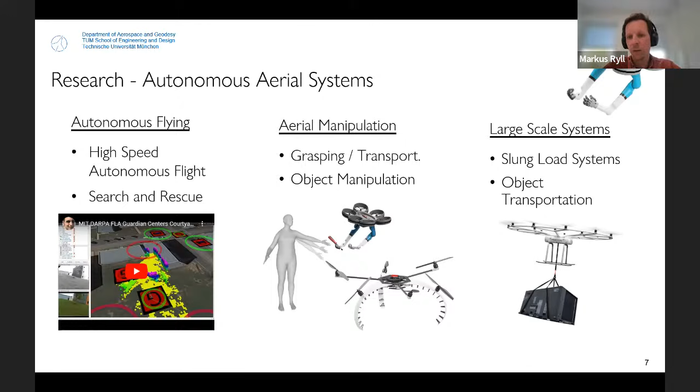Then, everything that we learned in the first 2 pillars, we apply on larger scale systems that require a very different set of safety constraints. This is because these kinds of platforms are really in restricted airspace and therefore have to follow all the regulations for restricted airspace.

So let's go into the field of aerial robotics. Aerial robotics is a growing field of research, and typical scenarios we tackle are, for example, the maintenance of broadcast towers, or the maintenance of power lines, as well as construction sites that are arbitrarily far away or remotely located, and the typical case of industrial climbers that have to maintain wind turbines.

The common theme of all these problems is that these kinds of tasks are first of all dangerous for human beings, and at the same time expensive, because either you have to employ industrial climbers to solve this task, or you have to use helicopters, or you have to set up scaffolding, which takes time and is expensive.

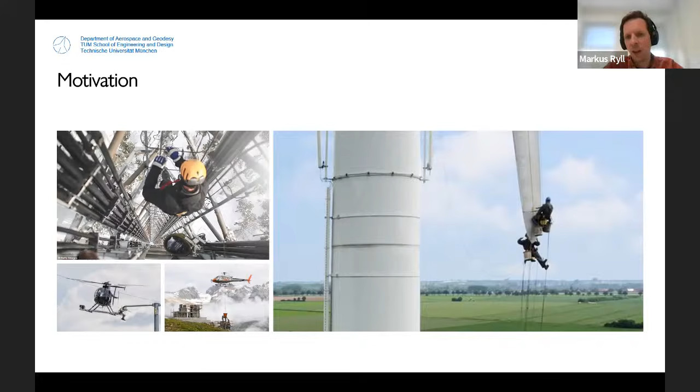And to motivate that a little bit more, I brought you a video today, and I hope you can see it. Otherwise, you could try to look it up on YouTube as well, you'll find it there. So what is conducted here, and I'll stop from time to time to explain it a little bit better, but I hope you can see it sufficiently well, is the maintenance of power lines.

And in order to do that, there are basically two different options. You can do the maintenance of a power line either by an industrial climber coming from the bottom. But in order to do that, you have to switch off the power line, because the risk is too high that you ground the power line through the climber, which would cause an electric shock to the climber.

The other option is leveraging helicopters, as you hopefully see in the video. What you see here is an industrial climber sitting on the landing gear of the helicopter or on a designated spot underneath it. The industrial climber is flown to the power lines.

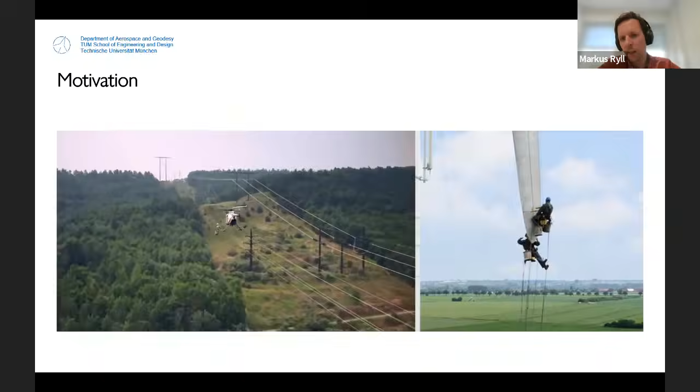And the task of the industrial climber is to climb on the power lines towards the power towers and check the isolators. That is, first of all, a very expensive task, but as well a very tedious and dangerous task. There are several fatalities per year in this kind of task.

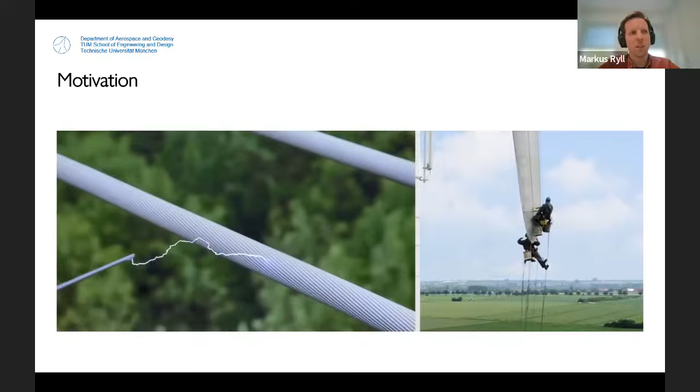Let me quickly jump a little bit forward so you see what is actually happening then. You will see that the industrial climber is putting a safety harness on the power lines and then crawling slowly towards the power tower to check the isolators.

And you can see as well on the parallel side, on the opposite side, there's a second industrial climber checking the other side. And you can imagine that this is a very tedious and very dangerous task.

So what we foresee on the long run for my group is to actually do this task with aerial robots, robots that have dual manipulators in order to perform it. But to do that, there are plenty of challenges that have to be solved before this is possible.

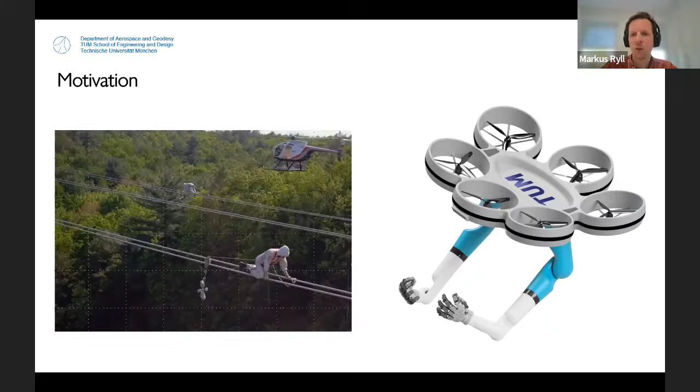In the next two slides, I try to summarize the three main challenges that I see in the domain of aerial robotics. What I'm going to do in the next few minutes is discuss the differences and challenges of aerial robotics compared to the typical case of a ground robot.

So let's start with the problem that we are working with a floating base. That's the first challenge, which I summarize under the topic of a floating base. You all know if we have a quadrotor that flies, we have to directly compensate any applied wrench to the system. If you think about a ground robot, you can just pull the brakes, and if you push it, the system will not move. But for an aerial robot, as soon as it experiences any wrench applied to the system, you have to directly compensate that.

Otherwise, it will quickly drift off from a desired position or orientation. Secondly, on flying robots, we have significantly higher, or more inaccurate, positioning. This is related first to the nature that we move in 3D, but also to the fact that our system is always vibrating and drifting. So we cannot stop and check for a long while or try to estimate our position or pose for a long while, we're always drifting. That generates, on average, a higher inaccurate positioning.

And last but not least, and therefore I brought you this picture, if you really want to do aerial manipulation, you have to have some kind of actuator on board. Let me quickly change here to the pen so I can highlight a few things. You can easily imagine if we have this arm underneath it, let me draw the arm. If we try to move this arm, we apply a torque with the motors.

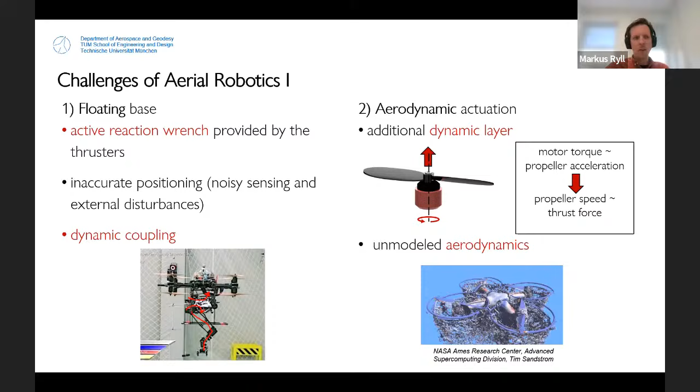Then the third challenge I see is the problem of having as lightweight a platform as possible, and this causes several additional challenges. If you think about the domain of aerial physical interaction, that usually means our end effector has to be built as lightweight as possible. That usually causes us to use very weak motors, and we build a structure that is very lightweight or hollow, which causes vibrations of the end effector.

And additionally, it causes, due to this lightweight structure, a lot of unknown non-linearities in the behavior of the end effector. And that is a challenge to use for a proper physical interaction.

Secondly, our perception is very limited, especially compared to other autonomous agents, like autonomous cars, due to the fact that we have to use lightweight sensors and a minimum set of sensors. So the most typical scenario on board of a UAV is that you have an IMU plus one additional sensor that tells you something about your pose. This can be a set of cameras, or just a monocular camera, or a LiDAR. But usually you have just one set of sensors, and they're usually small sensors of smaller cost. So the quality of these sensors is limited.

Last but not least, we have very limited computational power on board. That forces us to use simpler algorithms than we are used to, for example, in autonomous cars. And we usually have to decide whether we want a CPU on board or a GPU. Both are usually some kind of edge device, so again with limited resources.

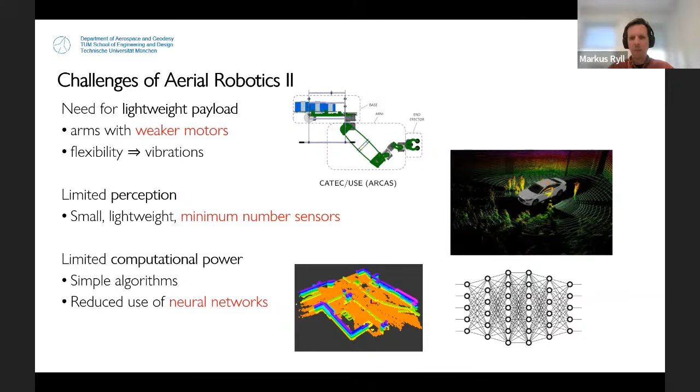First of all, this is a rather small scale platform, and it has more or less the dynamics of a flying fridge. It's a very small platform with a heavy computer on board, which relates to the fact that the flight time of the system is only about 8 minutes. The weight of the platform is approximately 2 kilograms, and the size is approximately 35 centimeters.

I guess most of you are familiar with this camera, but for those who are not, what we see on board is, in the center, an RGB camera plus 2 infrared cameras on the sides. These infrared cameras are used for stereo vision, and they provide an additional depth of the environment.

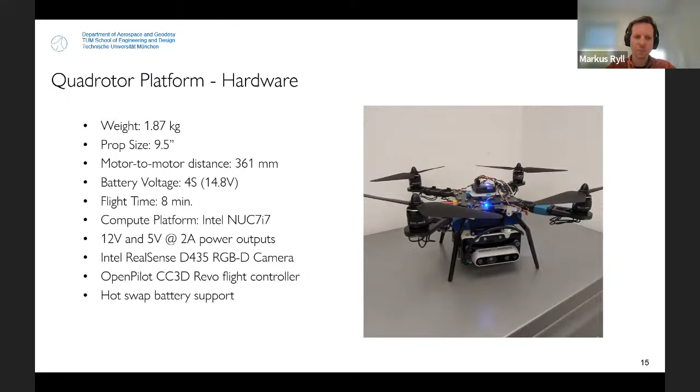Let me go to the capabilities of this platform. Overall, this platform and the software stack associated with it was aimed at enabling GPS-denied navigation. So we wanted to fly in an environment where we can't rely on GPS. That could be, for example, due to the fact that no GPS is available, due to a tree canopy, or we want to move from an outdoors into an indoor scenario, or we could assume that the GPS is jammed in the environment we're flying.

Additionally, we want to fly fast in a cluttered environment, roughly at an altitude of 3 to 4 meters. At the same time, what we want to do on board is object recognition. For example, we had an object recognizer running on the platform that detects cars, people, doors, and so on.

And we want to as well localize those objects. Additionally, we want to do a fully autonomous exploration of the unknown environment, creating while we're flying a dense 3D occupancy grid of the environment, and enable visual semantic segmentation. We showed that we can leverage classes of the underlying ground for the trajectory planning stack, for example segmenting roads and other classes of the environment. Last but not least, we implemented waypoint navigation.

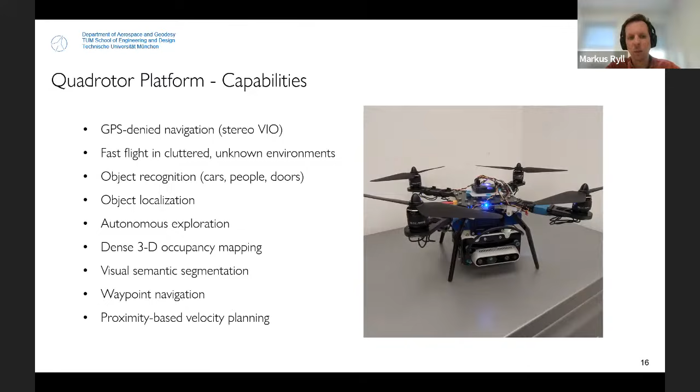So let's stop all this talking about the platform and let me show you a video with some experimental results. First of all, what you see here is the typical RViz environment, with highlighted in the center the actual representation of the environment with an overview image from Google Maps. What you see additionally here is the starting location, marked here at the bottom. The drone starts here at the bottom point.

The task of the drone now is to autonomously navigate to certain waypoints referenced to the starting location. The first waypoint is the one you see here at the top, just about 200 meters in front of the drone. Additional waypoints will be behind those buildings you see in the top right corner. In order to get there, the drone will have to autonomously find a small pathway between these two buildings you see here at the top.

Apart from this, the drone is actually programmed to be curious about cars. So as soon as the drone sees a car, it will approach the car and map it in this visualization of the environment you see here. What you see on board on the left side in this grayscale image is actually the object detector. For clarity, we have here in the lower left corner the RGB image from the camera of the drone. So let's get started.

We'll directly see the drone taking off and first heading towards the next waypoint, but then starts to detect the first car, so it deviates from the original flight path. As soon as it has mapped the car, it continues with the waypoint navigation. You see the drone reached the first waypoint, then detected again a car, and now continues to follow the waypoint navigation.

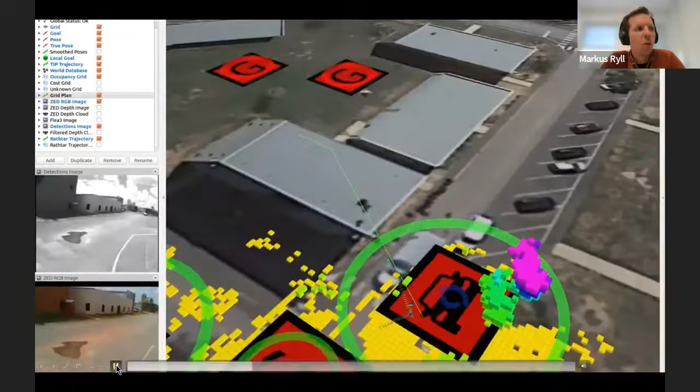Let's wait a second until the drone now navigates to the small corridor. So far, with a very limited perception, the voxel grid representation has not detected these two buildings you see here. In a few seconds these two buildings will pop up, and then the drone will start to navigate through the dense, tight corridor here.

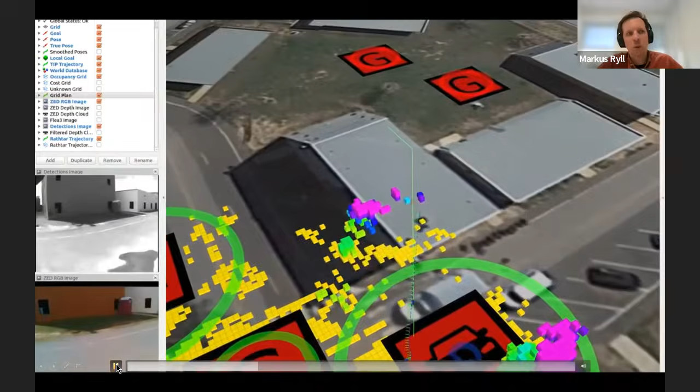A few words with respect to the corridor: the buildings were approximately 1.5 meters away from each other. That leaves a navigational space between these two buildings, given that the drone is approximately 50 centimeters wide from propeller to propeller, just a range of 50 centimeters on both sides. So we had to very tightly navigate through this environment.

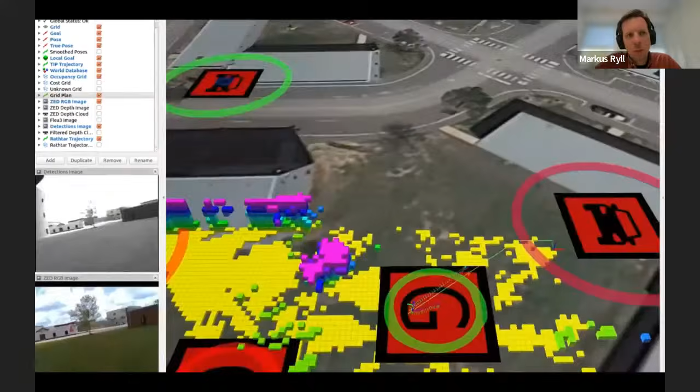What you also see from time to time in the voxel representation is some kind of salt and pepper noise that is just hallucinated by the RealSense.

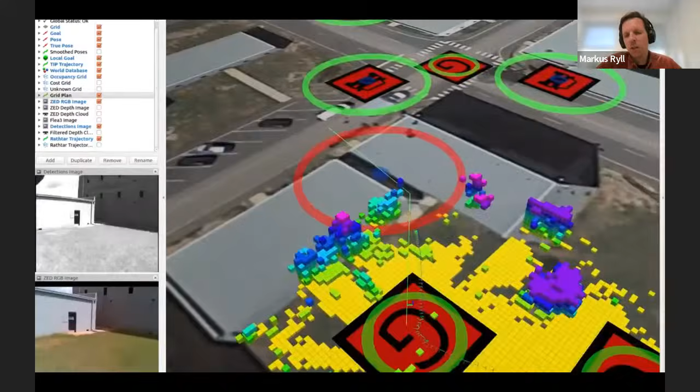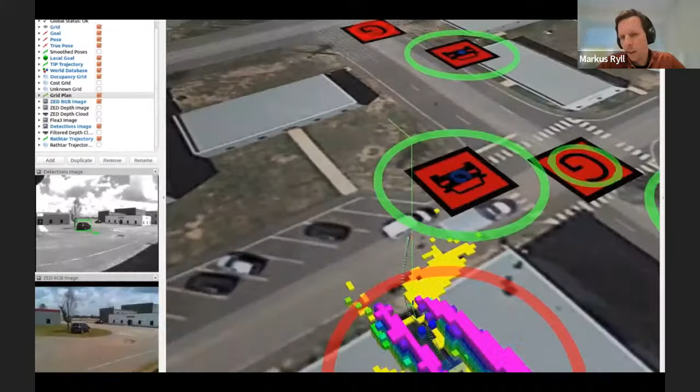A few words on the actual navigation stack: what we do on board for navigation is visual inertial odometry. There is no real loop closure happening in the background, but the visual inertial odometry framework we used here was basically an off-the-shelf VIO framework with approximately a drift of 0.5%. That means over a flight distance of 100 meters, we are drifting about 50 centimeters, which was sufficiently good for the planning we aimed for here.

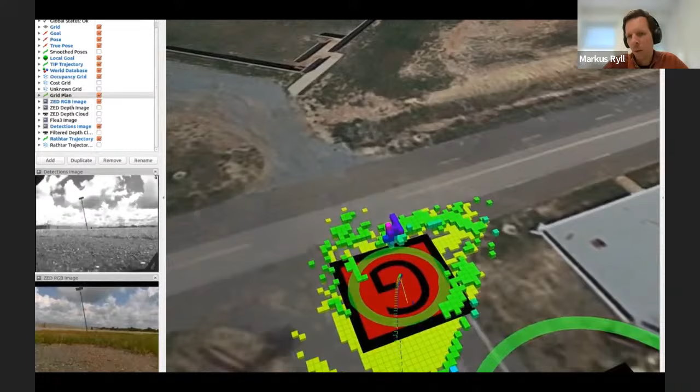You'll see that the last waypoint is flying back to the initial location, and you'll see that we very precisely land at the same spot where we took off. The overall flight path you saw here was approximately 600 meters long, and we managed to do that in a very fast time, flying partially with a velocity of approximately 15 meters per second.

So let me talk a little bit about the actual problem that we try to tackle here. The challenge in this work was to overcome the problem of the very short-sightedness of the actual drone—we only see 10 meters far. So what we had to create was a trajectory planner that is able to very aggressively replan the trajectory.

Summarizing that, we want to build an online planner that can work in GPS-denied, unknown, and cluttered environments, but the planner must be able to react very quickly to new, unforeseen obstacles in the way. Basically, in the end, we seek to find a very smooth, high-speed, collision-free, and dynamically feasible 3D trajectory generator. So let me show you how we did that for this project.

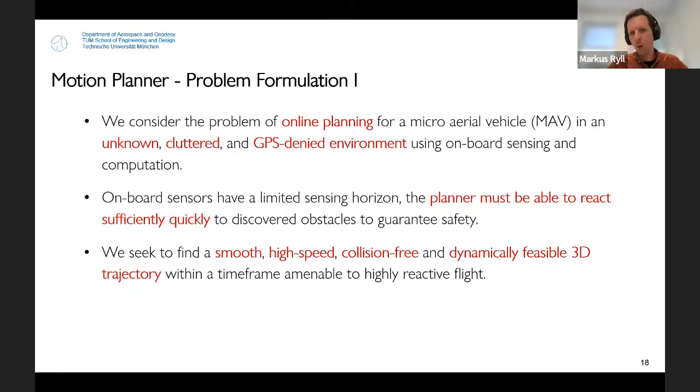This project and the motion planner was very highly successful. In the end, we did approximately 5 to 6 hours of flight time with only one real crash, due to an illumination issue—the RealSense didn't see an obstacle in the way. But we successfully flew distances over 20 kilometers with this planner.

So let's start with a new sensor image that arrives. First, this sensor image is fused into the inner core that generates the occupancy grid that you already saw in the video before. Building such an occupancy grid requires multiple depth sensor estimations, and this is one of the reasons why we had to run this inner core at a lower frequency. Additionally, to this occupancy grid, we built a distance grid towards a local goal that we want to achieve.

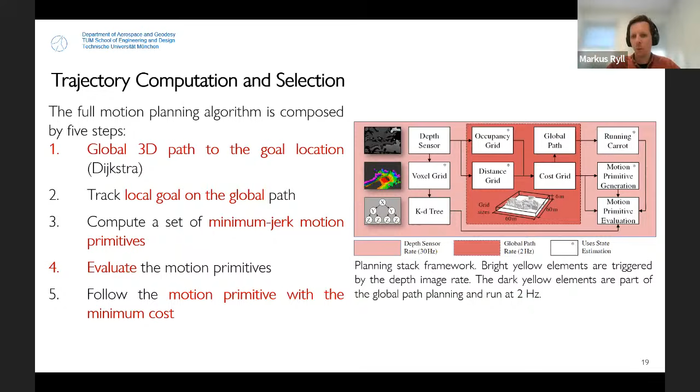That brings us to the second part of this talk on motion planning, based on path parametric motion planning. Let me go back a step and motivate path parametric motion planning - why do we do that in general? Motion planning is a very appealing problem and still an unsolved problem.

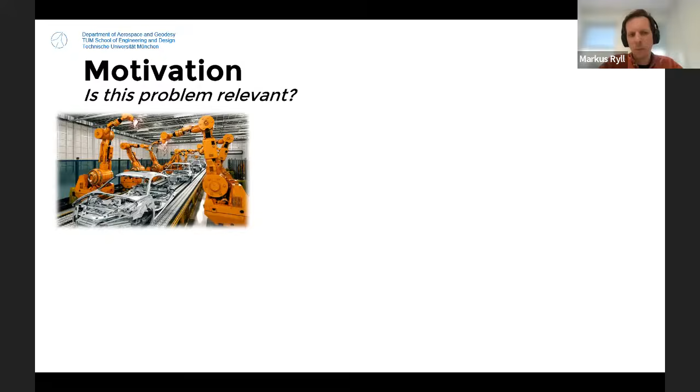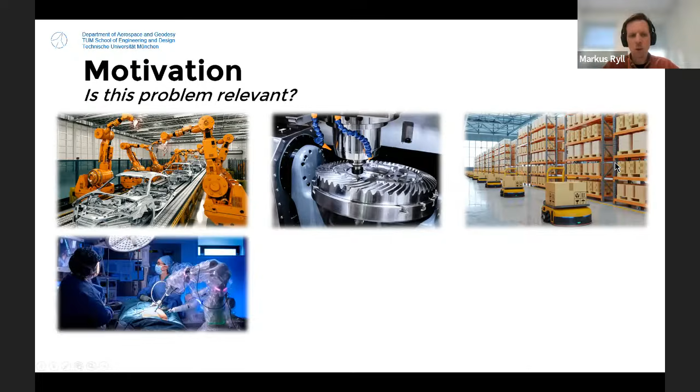Motion planning is a key ingredient for the industrial revolution, used for example in CNC machines, as a key ingredient to allow high precision manufacturing. It's used in multi-robot scenarios, like in fulfillment centers such as Amazon warehouses. It's also used for robotic planning in medicine, as well as leveraged in controlling satellites and space missions.

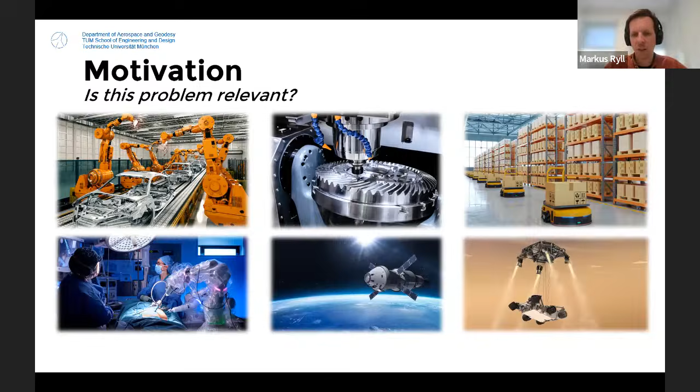And of course, it's a key ingredient for having autonomous platforms, for example, in remote areas. But let's go one step back. What is actually motion planning?

Here I just brought you a toy example. So what we're talking about in general is some kind of agent. This agent has some kind of dynamics, and it has some kind of dynamic constraints. The goal of motion planning is to bring this agent to a goal state. This goal state can be, for example, defined in position and the twist of the system, so the current velocity, translational and rotational, but the solution is shaped by the environment in between.

What the actual cost to go is, or the problem that you want to optimize, depends on the task at hand. So what you, for example, can try to do is build a fast robot or an efficient robot, or you could try to find the solution in the environmental motion planning which gives you the shortest path to the goal. But this is not the only problem we have to tackle.

We actually have as well the problem that we have to consider, for example, that we have very different kinds of agents in the environment. So it might be that we have this very big robot that first of all has different kinematic constraints, but as well different kinetic constraints. So for example, for this kind of robot, we have to find a very spacious path to the goal. So we see that motion planning depends on, first of all, the environment, but as well on the agent itself.

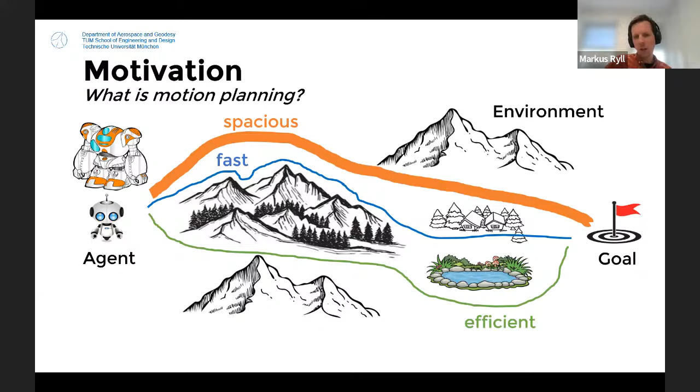So, is motion planning solved yet? Or is it something that we still fight with? In order to understand that better, I brought you two examples of why motion planning is actually a discipline that iterates with every other progress in the field. One thing that changes constantly is the hardware where we can apply our motion planning.

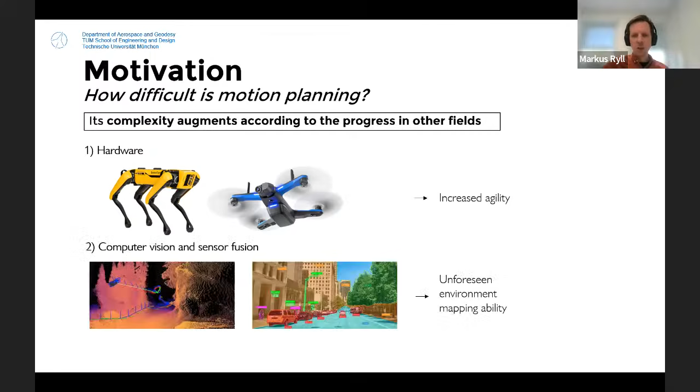Just to give you two examples, we have the Boston Dynamics robot, or one of these very agile drones. With the increased agility of platforms, the problem becomes more challenging. First of all, our platforms in general become more agile, which challenges the motion planning. But additionally, the control loops are getting faster and faster, which as well challenges the problem of motion planning, especially motion planning online.

Computer vision and sensor fusion are getting better over time, which results in a more fine-grained resolution of the environment. So a representation of the environment becomes more fine-grained, allowing us to better exploit the free space of the environment. But even more interesting, we get better at semantic scene understanding, which allows us, for example, to map our environment into different classes.

Even more important, we can, for example, detect other agents in the environment. And suddenly we're not planning in a static environment anymore, but we plan in a dynamic environment where we know other agents have specific physical properties as well. For example, it is important to avoid or fly by a car differently than we fly by next to a human being.

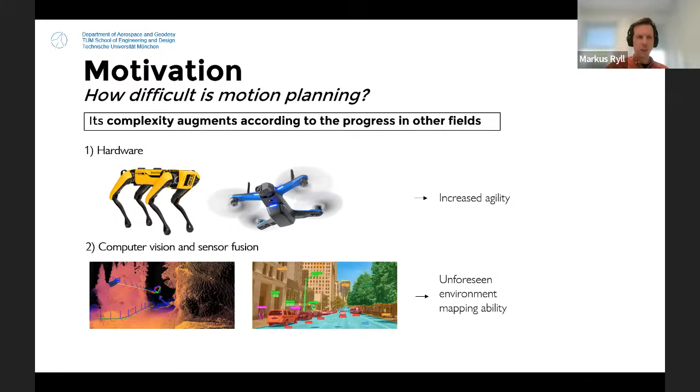So the overall motivation and research question we asked ourselves is: can we, given an agent, a constrained environment, and some performance criterion — and again the performance criterion we are tackling here is, for example, finding the fastest or most efficient path — formulate a motion planner that is capable of directly computing the optimal motion, obeying the environment's geometric properties and the agent's physical limits, while being applicable to any dynamical system, fulfilling the constraints of the system, and most important, running everything in real time.

So basically this can be summarized as: we want to be optimal, universal, safe, and efficient. Efficient here in the sense of being efficient computation-wise.

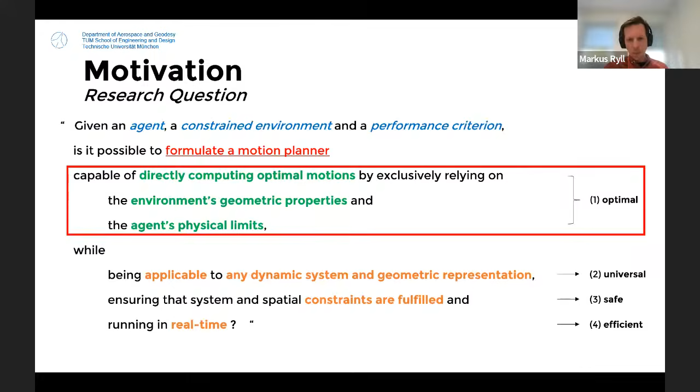We can describe this parametric path with certain features. This method assumes that the geometric path of interest is given by a function that maps the path parameter to three-dimensional coordinates. This mapping will be denoted as gamma, and the path parameter will be psi.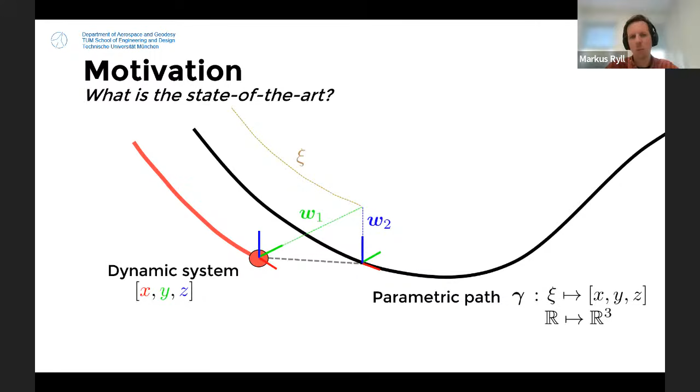Let me jump to the first problem we tackled. We said that what we want to do is express our Euler coordinates in spatial coordinates. One approach tackled in the past, which we tried first, is leveraging a frame called the Frenet-Serret frame.

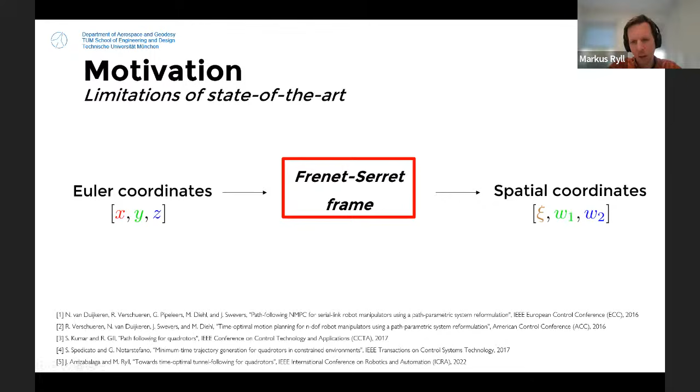This has been exploited in the past by other people as well. The goal for this project was leveraging the Frenet-Serret based frame for a racing scenario of a quadrotor.

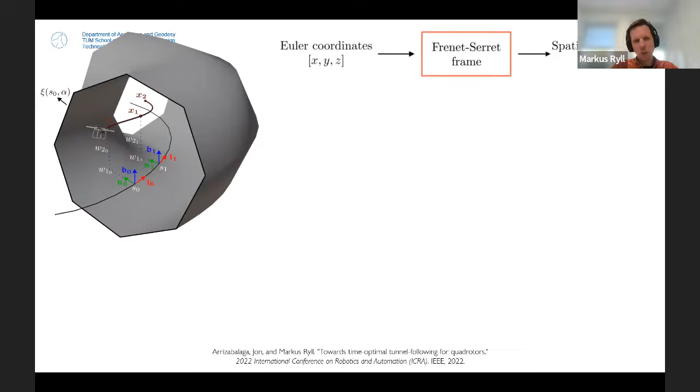So basically what we did is formulate the dynamics of the system with respect to our path, shown here in the center, and the dynamics of the system are represented with respect to that path. Let me show you a video of these results.

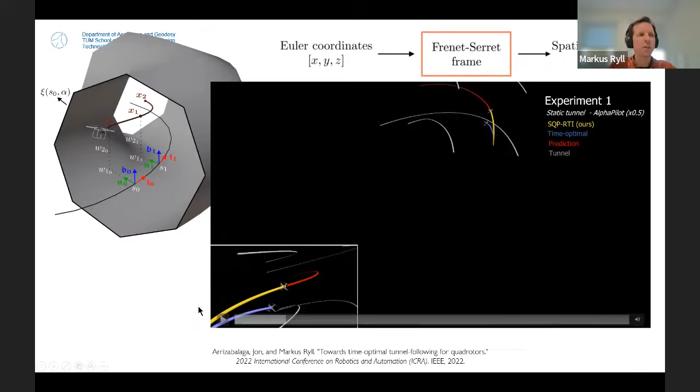In drone racing scenarios, the goal is usually to fly through certain gates, following the AlphaPilot challenge. You'll see that in spaces where there's a gate in this racing scenario, the free space is shrunk to the size of the gate to fly through. Let me pause here.

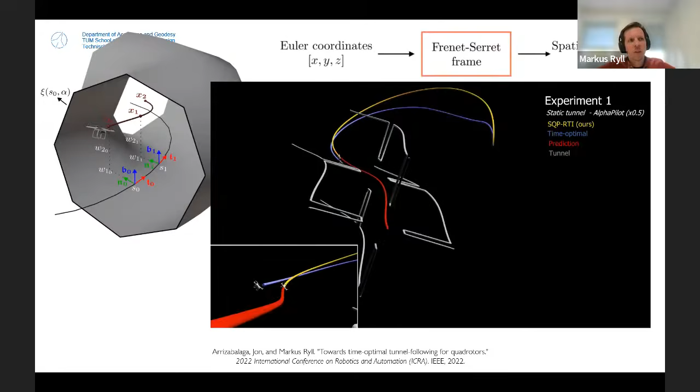You see here the visualization of the gate, and the next gate as well. This red line is the prediction of the nonlinear MPC solved while flying this trajectory. You can see our solution finds a result very close to the time-optimal solution. Of course we don't achieve the time-optimal solution itself, since that takes hours to compute, but we get really close to it.

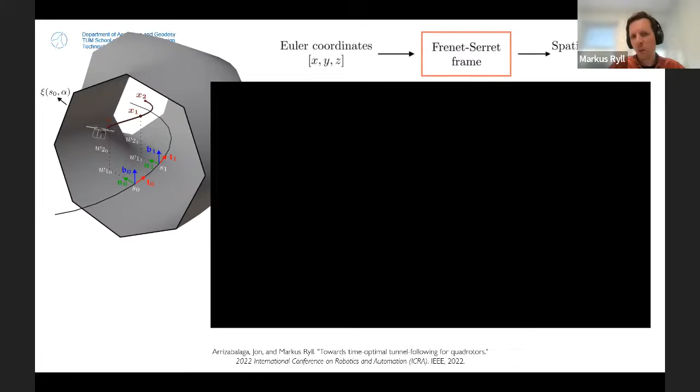Starting from here with this reformulation of spatial coordinates, we realized that there are some limitations to the Frenet-Serret-based frame. And this brought us to the next topic.

Let's quickly have another look at the Frenet-Serret-based frame. We can express it with coordinates that depend on our path description. Just to explain, what we see here with the bar is the derivative with respect to the coordinates of the path.

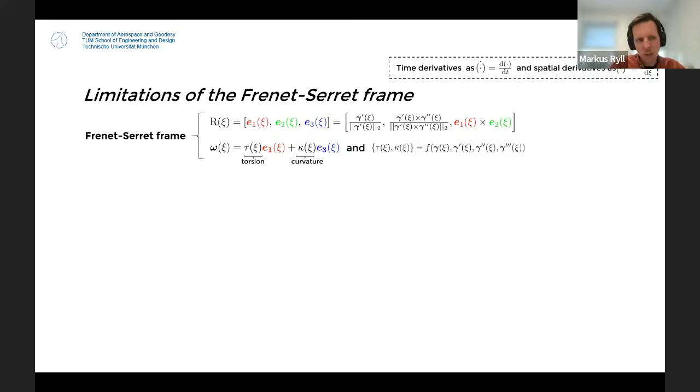Here we see the expression of the Frenet-Serret-based frame. Basically, it gives us directly the torsion and curvature of the frame, resulting in a very simple analytic representation of the path, but it comes with a cost. If you want to combine multiple paths exploiting this frame, you get a nonlinearity or singularity at the point where two curves conjoin.

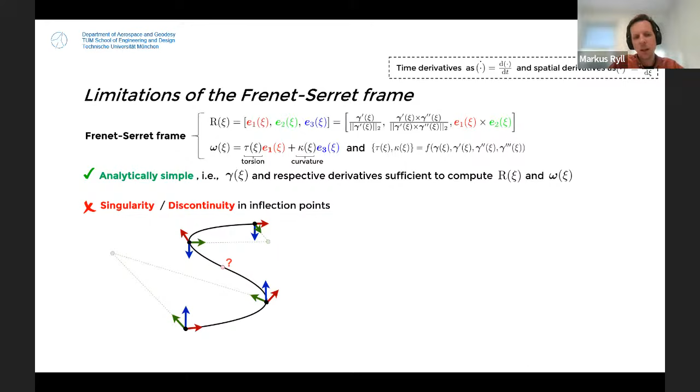Why is this the reason? If you look again at the description of the Frenet-Serret-based frame, the y-axis of the frame always points to a certain direction, into the curve or the radius of the curve of the path segment. This causes a discontinuity or singularity at the point of combining two different frames. This is the first drawback of the Frenet-Serret-based frame.

Additionally, if you look at the orientation of this frame, there is an undesired twist, which usually causes the system to require more energy than actually needed when trying to track it exactly. Doing some literature research, we found that there are rotation minimizing frames, which is definitely a better solution, but at the same time more complex.

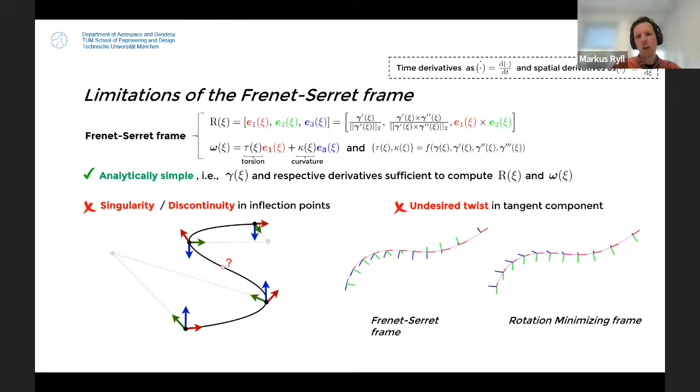So let's take a look into different rotation minimizing frames and how they're expressed. The question we asked is: is it possible to formulate a singularity-free, continuous, and twist-free spatial representation of the Euler coordinates by relying on an exact formulation and a compact representation of the environment? This was the research motivation to come up with a better representation than the Frenet-Serret-based frame.

What does this entail? First of all, it shall be compatible with optimization algorithms. It should be a smooth environment. And last but not least, no approximations and few coefficients, resulting again in computational efficiency.

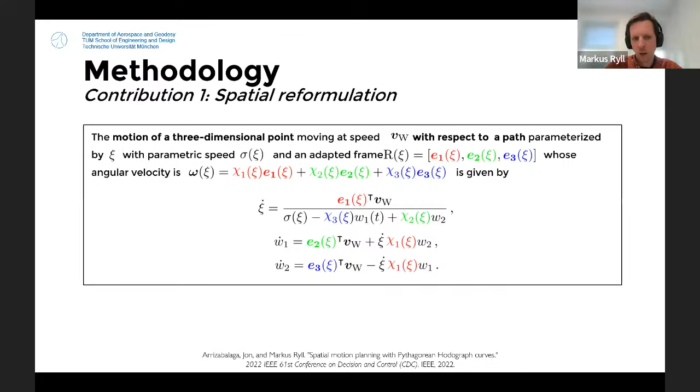The first step we did was basically just doing the math to express our system dynamics with respect to a moving target on a path. And what we ended up finding is something called Pythagorean hodograph curves.

Pythagorean hodograph curves are highly used, for example, in the field of computer graphics. They are very efficient and continuously defined functions. So pH, or Pythagorean hodograph curves, as I'll call them from now on due to the long name - pH curves are a subset of polynomial curves whose parametric speed is the polynomial of the path parameter.

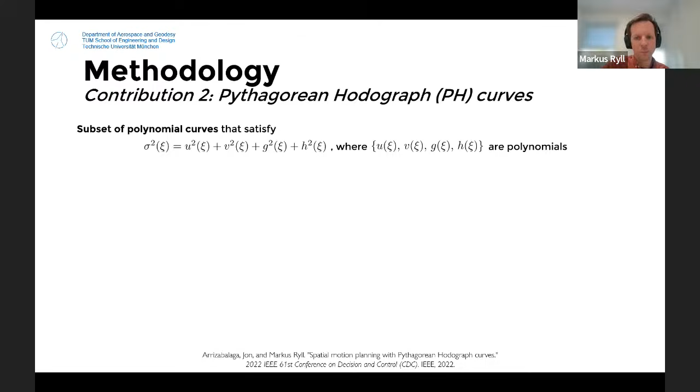More specifically, the path parametric functions are related to four polynomials, which can be collocated under quaternion polynomials. What does this bring us? We can formalize this with Bernstein coefficients, which gives us curves of an arbitrary degree - we can choose this degree by selecting the polynomial order of these functions, with the fact that we have 4 times n plus 1 coefficients. With that, we have an extremely powerful tool to express any arbitrary curve in a given environment.

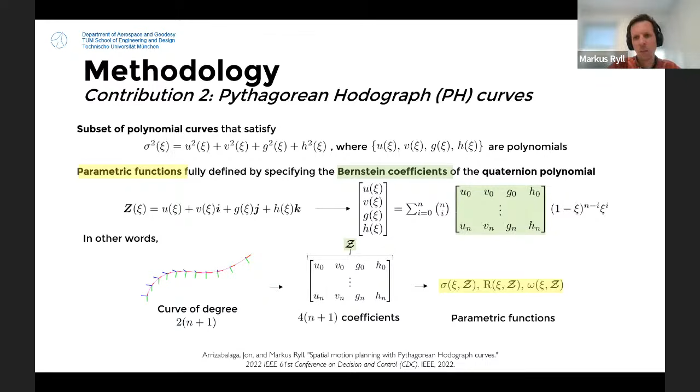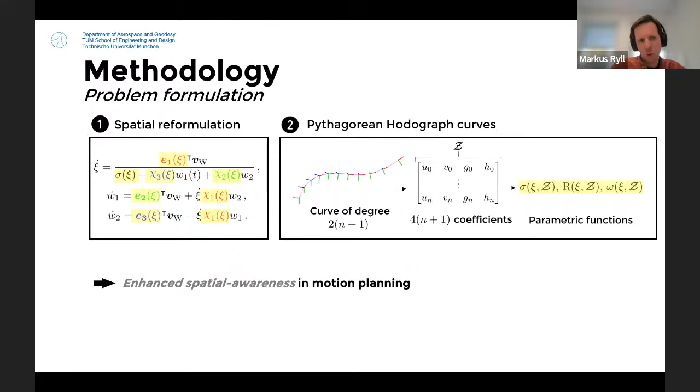Let me bring this to an end. How did we formalize our problem? We first expressed the dynamics with respect to pH curves of an arbitrary system, and then defined our Pythagorean hodograph curves. We leverage this in an MPC control framework, which brings us enhanced spatial awareness in motion planning. Let me show you the results of that.

So the overall idea is as follows: first, we assume that we have some kind of free space, and we assume that this free space is given - for example, by perceiving the environment.

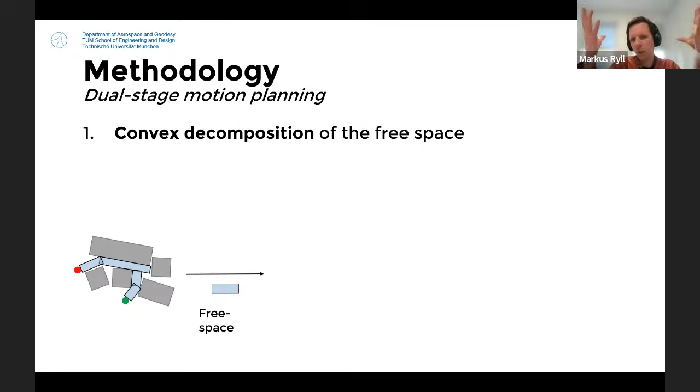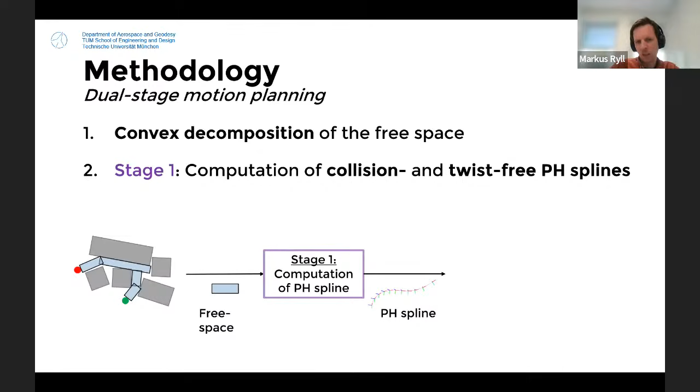Imagine we have a system with a depth sensor that can observe the free space, and we plan to the end of this free space. Then in the second step, we compute our PH spline in this environment. This gives us the formulation for the NMPC, the Model Predictive Control, and finally we compute the NMPC based on the PH spline.

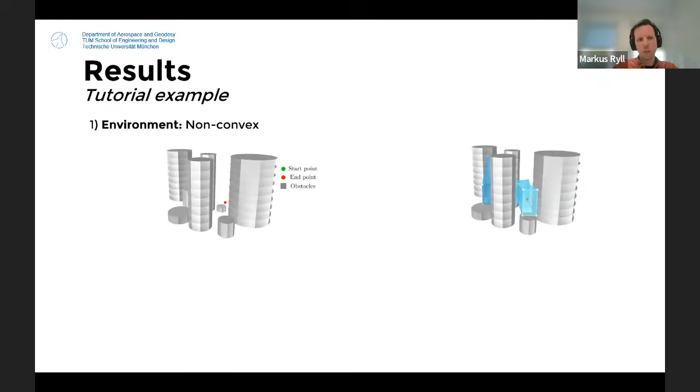Let me show you some experimental results. We first started with a rather complex environment with a start point and an end point. Then we fitted a representation of the free space, highlighted here in blue, and built into this free space we found our PH curves.

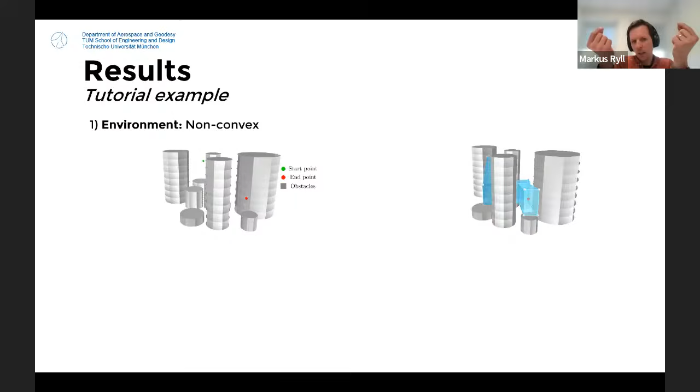Maybe one step back again. What's important to understand is that we use the PH curves only to represent the free space environment. It's not the goal to actually track those PH curves, but we leverage the representation of the dynamics with respect to the PH curves to formulate an MPC problem that can be solved very efficiently, since the geometric description of the problem is described inherently within it.

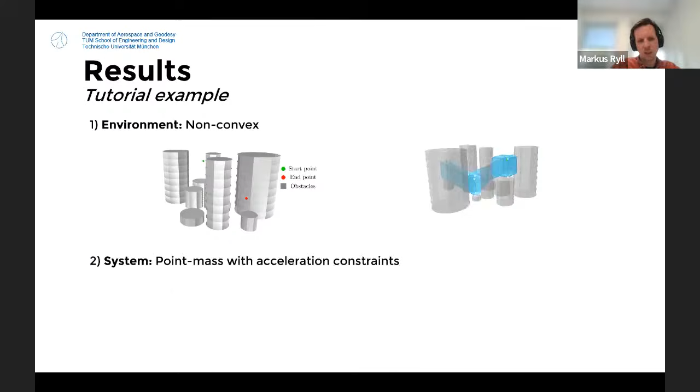Let me show you some results here. What you see, I hope big enough, is the representation of the environment, the free space, with the coordinate frame, and the found PH curve that passes through the environment. Once we feed this into the MPC problem, you see a solution of tracking the desired trajectory in an optimal way.

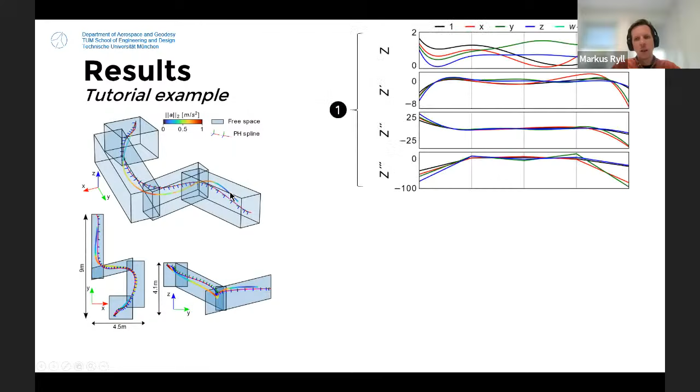We can now represent and take a look at the path parameters of the PH curve. But what's even more interesting is if we take a look at the solution of the Model Predictive Control framework, we see that, for example in the acceleration, we always reach the physical limits of the system.

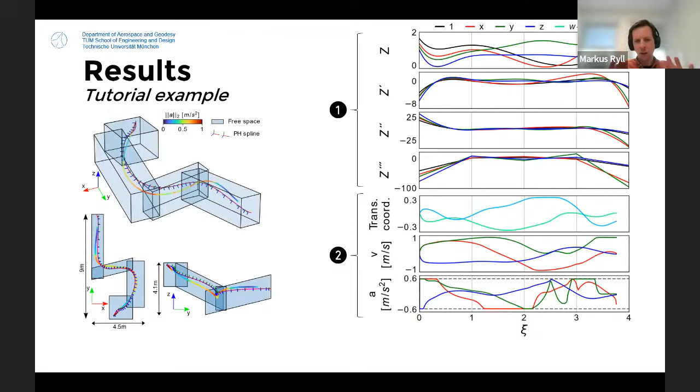So let's conclude this topic for a moment. What we achieved here is that we formulated a singularity-free planner that is continuous and twist-free, that allows for an exact representation of the environment and is very compact.

Let's stop here with this first part of the talk, and let's come shortly with a few minutes on the second part of the research that we're doing in my group. This is now on leveraging deep learning in an MPC framework.

Let's go one step back and talk about the problems we have in flying autonomously with these kinds of platforms, for example drone racing. Many of the effects we see there are highly nonlinear, and especially the problems of aerodynamics are extremely hard to model. If we want to leverage model predictive control, which is widely used in robotics, we have the problem that to do the rollout of the MPC we have to rely on models that only rely on first principles. Otherwise, we would not be able to run an MPC framework in real time.

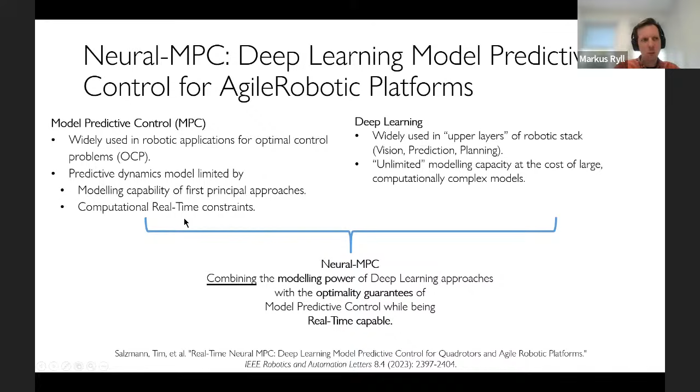On the other hand, we have machine learning and especially deep learning, which is usually more used in the upper layer of robotics, for example in perception, like semantic classification and these kinds of problems. Deep learning has the benefit that, depending on the size of your model, you almost have an unlimited modeling capacity, meaning you can pretty well learn the aerodynamics of a system. What we've done in the framework of Neural MPC, this paper, is combining both deep learning and MPC in a real-time approach.

Let's quickly talk about real-time iteration and MPC. How is this done? First of all, we basically have three different options. We can assume that the state does not change between two MPC time steps, or we could assume the change only varies slightly, so we'd have to solve our problem in a sequential process. Or, if we have a high frequency leading to small changes, which is what's usually done in real-time iteration, we only solve the problem in a single quadratic program. This is the standard way to solve real-time MPC.

What we have to accept in real-time MPC is that we solve the problem every time step, and we basically just linearize it. So we assume that there are really only small changes.

Of course, we're not the first ones that want to run a large learned model in a real-time framework. But how this is usually done is: first offline, you collect your data, then you define your PyTorch model or whatever framework you'd like to use, and you train a rather small model. Then you copy your weights to the model predictive control framework, compile it, and in the online approach, when you run your hardware, you first run the MPC with real-time iteration, and then you hope that due to the size of the framework, everything is fast enough.

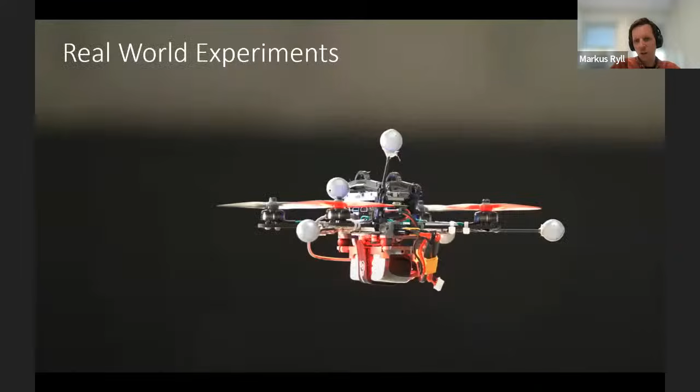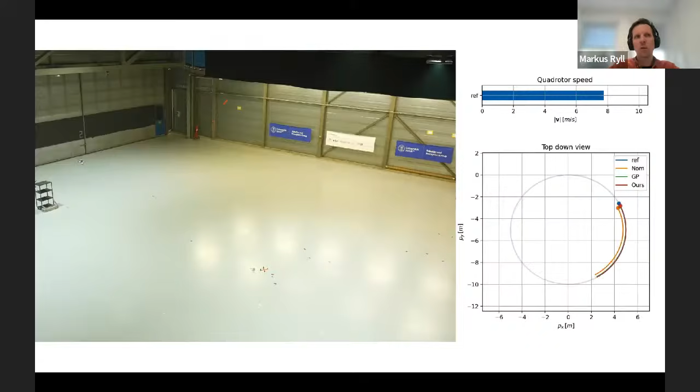Let me show you two real-world experiments. What we've been doing here is trying to fly with a quadrotor, first in a circle, and then within an H-shaped trajectory, increasing the velocity of the quadrotor over time.

We now followed the H-shaped trajectory, and you see that we have extremely fast changing dynamics of the system, and we quickly end up in the downwash of the propeller itself. To learn the model, we flew this trajectory two or three times. Then afterwards, the goal of the problem was to track the actual H-shaped trajectory as accurately as possible.

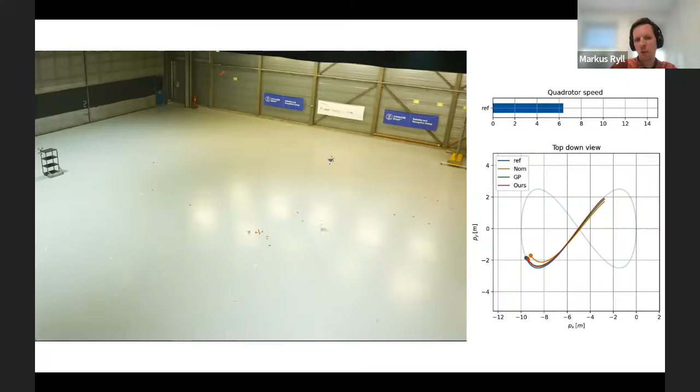And we could show that with this learned model, we could significantly better, up to 60% better, track the references than, for example, the state of the art using Gaussian processes.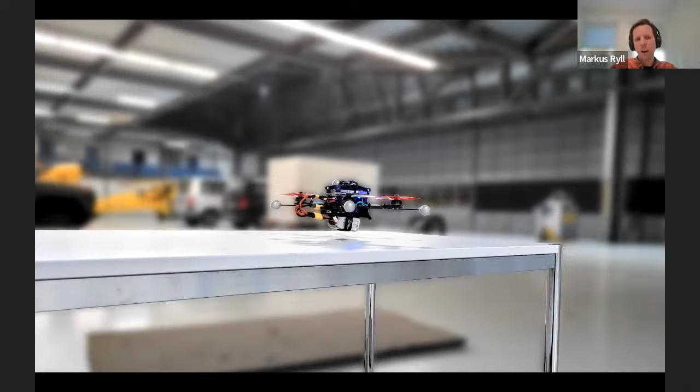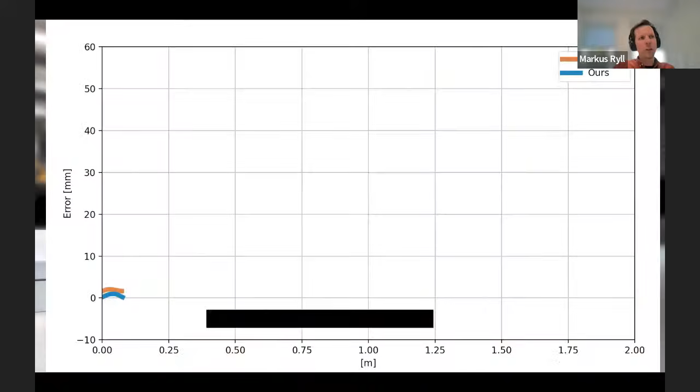What you see in blue is our approach, and in orange the baseline, again using Gaussian processes to model the behavior of the drone. You see that we track the desired constant altitude over the table significantly better than the baseline.

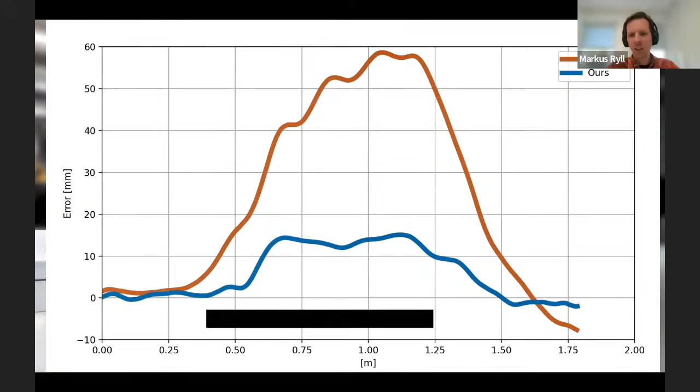Okay, this brings me to the end of this talk. I know I took a little bit longer than expected. I first want to thank all the people in my group collaborating with me. This was not done by me alone, but mostly the work of my PhD students.

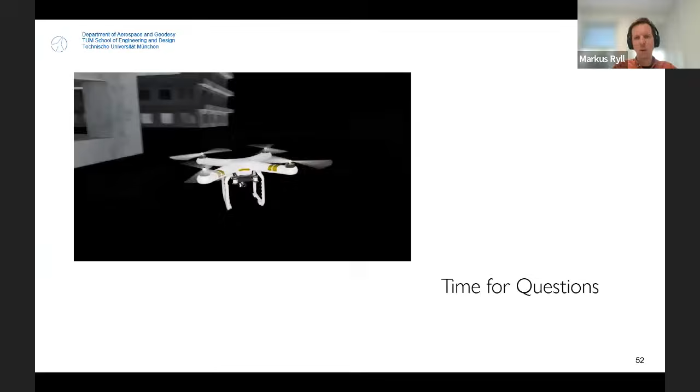The work I mainly presented today was the work of Tim Salzmann on real-time MPC, and of Jon Arrizabalaga, who is working on trajectory planning. And of course, this is research collaboration with lots of groups. Now we have time for discussions and questions.